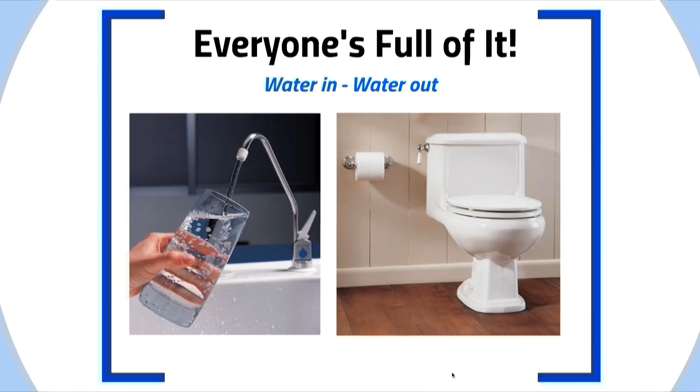Long ago, when the earth was young, the skies rained and there was plenty of water, and those people of that time had plenty of resources. Now fast forward a few thousand years, and now we have millions and billions of people on the planet Earth, and they're all consuming water. Every day, you and I consume hundreds of thousands and billions of gallons nationally. As you know, we're right in the middle of a severe drought that's been going on for several years.

I think it's important for us to stop for a minute to understand where our water comes from. So we're going to start with the Sierra Nevadas. We've got a snow melt up in the Great Sierras, and that water melts down and feeds the Great California Delta, which is the San Joaquin and Sacramento rivers. Some of that water is diverted over the Contra Costa Canal, and then some of that water is diverted over to the Los Vaqueros Reservoir.

I'd like to stop right now and have Chris Dundon come in from the Contra Costa Water District and discuss the California regulations on water conservation.

Good morning, my name is Chris Dundon. I'm the Water Conservation Supervisor at Contra Costa Water District. Back in 2014, the governor declared that we were in a severe drought. He declared the emergency and he called on all Californians to conserve water in every way possible. In April of 2014, he asked every city and community to reduce their water use by 20%, and agencies up and down the state did so.

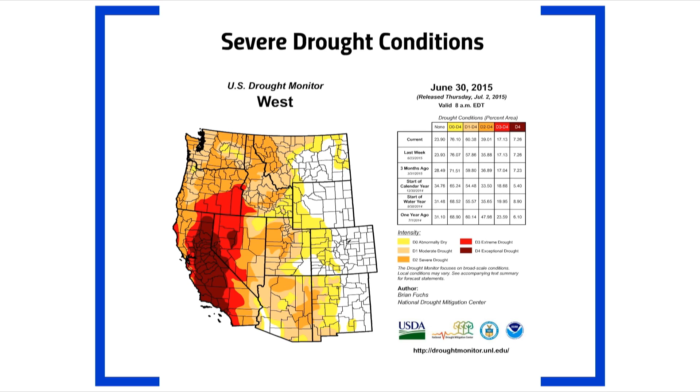The severity got worse, and as you can see in this map here, California is in a very severe drought right now. It's in what we consider an exceptional drought, and most of it is in the Central Valley and in the area we're in here in Martinez.

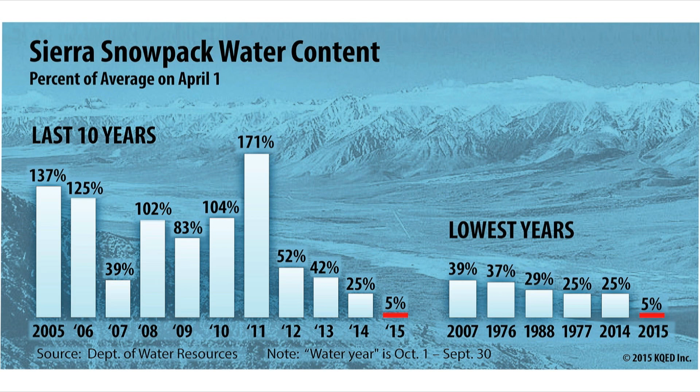Let me talk for a moment about snowpack. You know your water comes from a reservoir. You can think of a reservoir as perhaps a lake where we pump water and it goes into a canal and comes to you. It could be a reservoir in the city hills in Martinez, you might see a tank. That's a reservoir. The biggest reservoir we have in California is the Sierra snowpack. Think of it as a giant tank holding water all the way through spring, and then it lets it out during the spring and summer.

Our reservoir is at its lowest level ever. The Sierra snowpack is now at 5% of what it should be on average. That's lower than the previous lowest level, which was in 1977 at 25%, and again in 2014. So our snowpack is really low this year.

In April of 2015, this year, the state imposed some mandatory restrictions. The governor said, I'm issuing an executive order mandating substantial water reductions across our state. As Californians, we must pull together and save water in every way possible. He authorized the State Water Resources Control Board to have a statewide reduction of 25%. So the mandate was to reduce 25% statewide, and he authorized the state board to determine how they would implement that. So it didn't mean that every community had to cut 25%.

They evaluated how low some communities were and how high some were, and so it ranged anywhere from 10 to 35% what each water district was asked to cut. Contra Costa Water District, which serves this area, including the city of Martinez, were asked to cut 28%. In addition to the call for reduction in water use, the state board also adopted a series of water waste prohibitions. Many of these are fairly basic, and a couple are a little bit more draconian. No using water to wash down sidewalks. That's a given - when you're in a drought, you shouldn't ever do that.

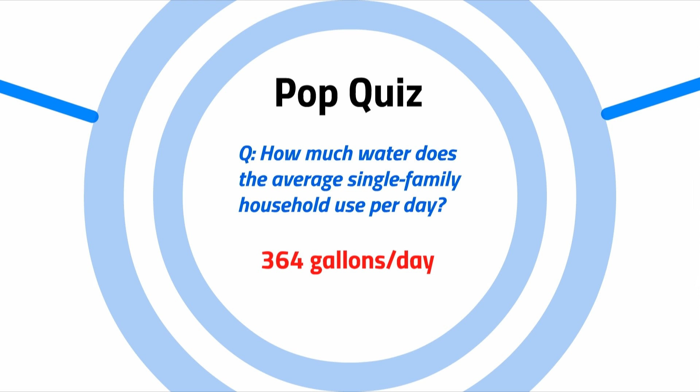How much water does the average single household family use every day? Any ideas? Any guesses? The answer is 364 gallons per day. That's the average here in Contra Costa County. And we're going to use that number moving forward as we discuss ways to conserve at home and outside.

And so what we're going to do is we're going to take that indoor number, that 153 gallons, and we're going to focus in on ways to reduce that number. But before that, I want to really focus in on that 364 gallons per day.

It multiplies out to be over 132,000 gallons per year. That's a lot of water, and if you start looking at it as an individual unit, imagine having all those gallon jugs around.

We've got a lot of water that we consume, and another way of looking at it is in 55-gallon drums. If you take your daily allotment, you every day use 6.65 55-gallon drums. So imagine every day a truck delivering 6.6 55-gallon drums to your household. That's really what's happening when you take that 364 gallons and multiply it out.

So every day we're using this amount of water, and so we need to reduce our 6.6 down significantly. So our target here in Martinez is 25%. That's 91 gallons per day total. And it's broken down to 38 gallons indoor and 53 gallons outside.

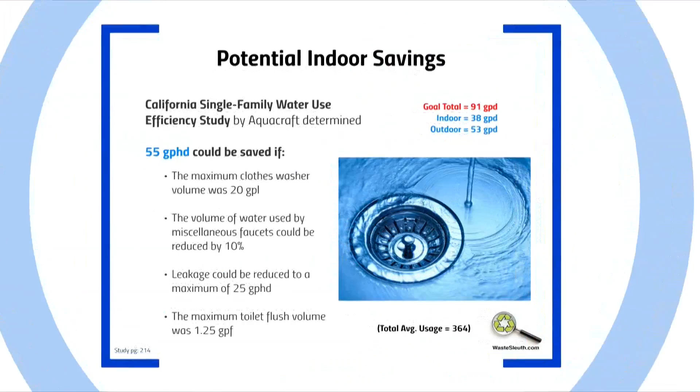An organization called Aquacraft did a study statewide focusing on water consumption in California, and one of the findings is very interesting. It shows that 55 gallons per household per day can be saved by some basic changes. First, using a conservative clothes washer with a maximum of 20 gallons per load. Next, reduce miscellaneous faucet use by 10%. Reducing or eliminating leakage can save 25 gallons per day. And using a low flow toilet with a maximum of 1.25 gallons per flush. If a household had those four practices in motion, you would save 55 gallons per day, which, by the way, is 2 gallons over your outdoor goal. So there are some good numbers right now.

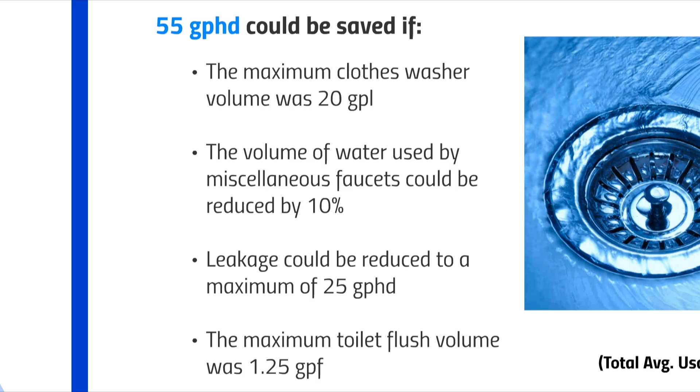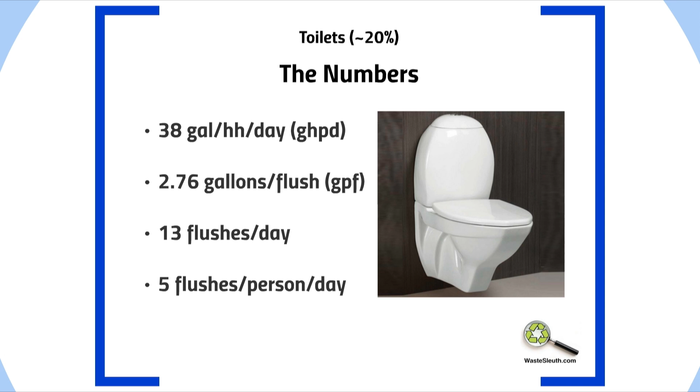So let's jump in and talk about toilets. Here are your basic numbers: 38 gallons per household per day, with an average flush of 2.76 gallons per flush, 13 flushes per household, and 5 flushes per individual. Now that may be different for you, but these are the state averages, and we're going to use those moving forward. When we talk about different types of toilets, there are high flow, low flow, and ultra low flow, high efficiency toilets. The high flow, old fashioned toilets use anywhere from 3.5 to 5 gallons per flush. The ultra low flow use 1.6 gallons per flush, and the high efficiency toilets use 1.8 down to 1.28 gallons per flush.

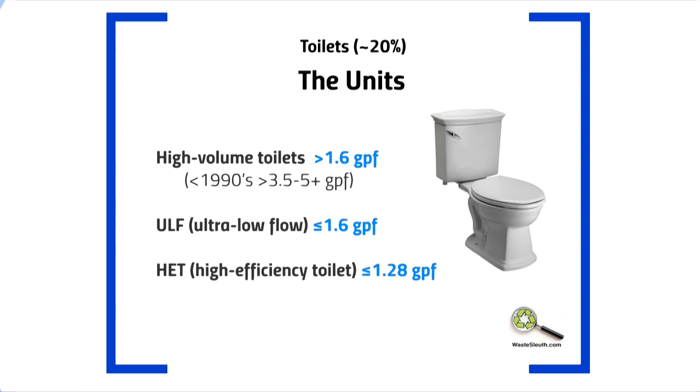So 20% of your daily use is coming from a toilet. Now, I'm going to break this down to an individual and what you can do to save water as it relates to using the toilet. If one person uses the toilet, depending on the type of toilet you have, will determine how much water you can use or save. With a high flow toilet, over 6,000 gallons annually. With an ultra low flow, just under 3,000 gallons. And with a high efficiency toilet, just over 2,300 gallons per flush annually. So if an individual can move away from 5 flushes per day and reduce that by 2 flushes, you will save over 14.5% of your daily reduction target. So reducing by 2 flushes, you're gaining 14% on your target. We're going to tally all that up at the end here.

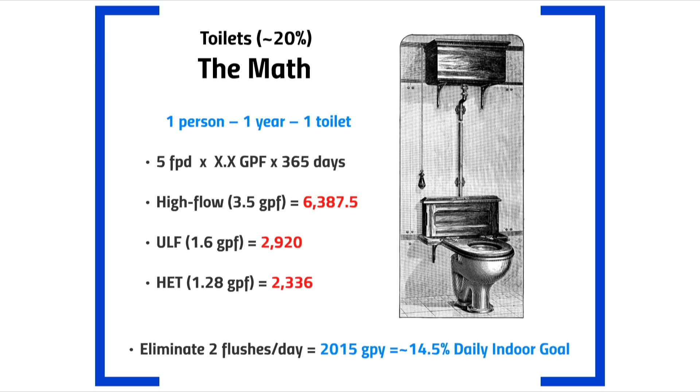So here's the action that we want you to take as it relates to toilets: eliminate all the leaks, check to see if the flapper is leaking, and check the tank level.

If it's too high, it's going to overflow that little overflow spout, and you're going to every once in a while hear it auto-filling. Don't use the toilet as a waste basket. Don't just throw things in there and then flush it away.

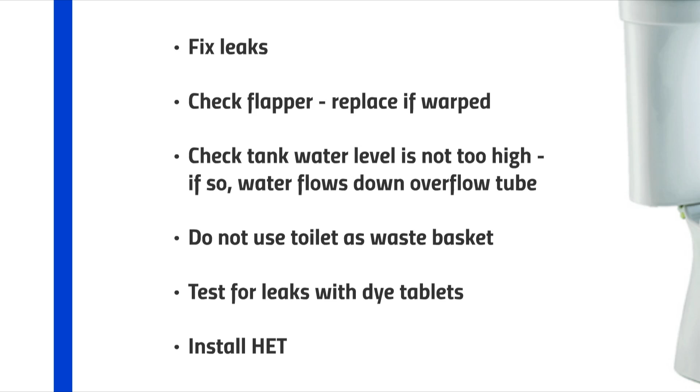Test for leaks. The Contra Costa Water District is offering these dye tablets. If you don't have these dye tablets, you can just use food coloring, like you'd use to color frosting on a cake. Put the tabs in the tank, or put some dye in the tank, wait a few minutes, and flush. If the bowl has color in it, then you've got a leak.

So fix that. There are many water-saving options or devices you can use. One possibility is using this bladder. Now, I want you to understand this bladder is just for a very high-flow toilet, nothing low flow or ultra low flow, because the bag goes in the tank and displaces the amount of water. If you put this in a low flow toilet, when you flush, you won't get enough volume of water, and you'll have to flush a second time. So this bladder is very good if you've got multiple toilets in the house and you're not going to replace all of them. You can put one of these bladders in a high flow toilet.

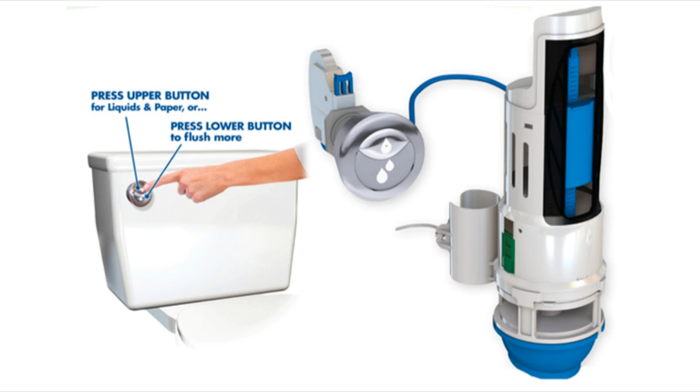Another option is an aftermarket kit you can buy that will allow you to have a dual flush on your toilet. The old saying and the new saying now is, when it's yellow, let it mellow; when it's brown, flush it down. So there you go, you can use that dual flush system. They're sold in kits, and you go in there and install that yourself, or hire a plumber to do that for you. And there's your test dye tabs, and you can put those in there.

So now we're going to move on to showers. Here are your numbers. On average, the average household has 2 showers per day. On average, we're using 18.6 gallons per shower. The duration is 8 minutes and 42 seconds. And the average gallons per minute is 2.14. So those are the basic numbers.

Here's the math as it relates to an individual. If you eliminate 1 shower per day, you can save 50%, or 49%, of your daily indoor water goal. So it's an amazing amount of savings. And if you reduce it by 2 minutes, that's another 11% of your indoor goal. Now, I mentioned already, we're going to roll all these data points up to show you how all these individual acts add up to a lot of savings.

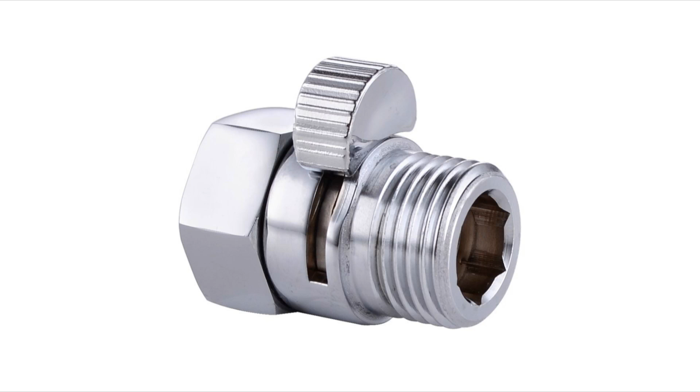You can install low flow devices. The county offers a lot of these shower heads, and they come in different models. You can go to the local hardware store and buy these. This unit here is the one that's given away for free, and the others are some really good looking low flow options. Another thing you can install are these on and off devices that allow you, when you're sudsing up or shaving or whatever in the shower, to turn off the water or turn it down, which will allow you to save water while you're in the shower. They're pretty easy, not very expensive, and you just add them in between your pipe and your shower head.

So, actions you can take to save water: check for leaks at the faucet where you turn the spigot on to turn on the shower. If it's dripping a lot of water there, you want to fix that leak. That's a great opportunity. You want to install low flow shower heads. A lot of folks are realizing there's a lot of water used getting cold water to hot water, so they're putting buckets or tubs underneath the spigot, waiting for the water to get hot. It's a great technique to save a lot of water. You don't want to use a very big bucket because water is very heavy, maybe nothing more than 2 or 3 gallons. You fill that up and then go water your backyard.

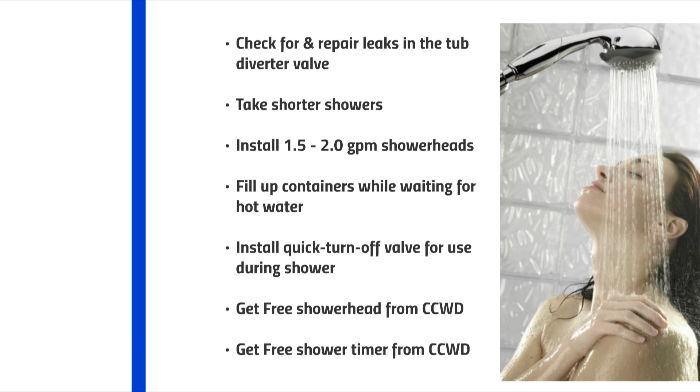Install one of those quick devices I just showed you, one of those turn-off devices, and then certainly install a low-flow shower head—you can get one of those free. There's also shower timers available, like this 4-minute timer. You install one of these on the tile or glass door, turn it, and once it empties out, it's been 4 minutes. So let's move on to faucets.

On average, we're using 33 gallons per household per day with our faucets. We have 57 events per day. That means during the day, in the average household, 57 times we're turning on that faucet, on and off, on and off.

For me, this is something I'm really paying attention to. It's really amazing when you think of 57 as a daily occurrence. Being aware that, you know what, this is one of my 57, maybe I don't need to turn it on, or being very concerned about how long I keep that water on. It becomes an opportunity.

35 minutes is the average use time. 37 seconds of those 57 events, we're on for 37 seconds. So there's a lot of numbers here, but the bottom line is we use our faucets a lot, and that becomes an opportunity for reduction.

So here's the math. If we used 38.5 gallons per day throughout the year, it's 14,000 gallons a year. So what I'm asking you to do is reduce 5 minutes of your 35-minute use time, and that will equal 14.5% savings on your annual or daily use. So again, moving towards your daily goal of 25%, that's 14% right there. We're going to look at that number in a while.

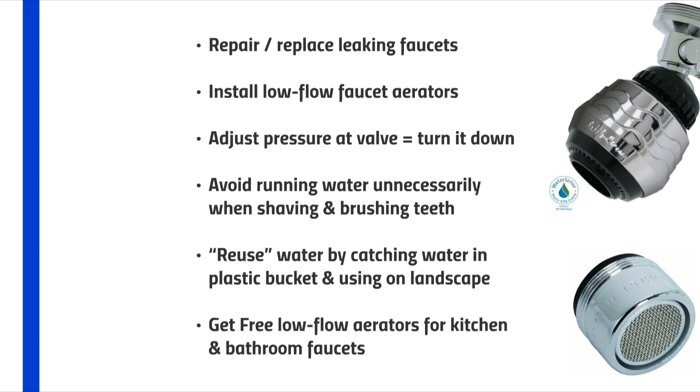Also, inserting these low-flow faucet aerators, something like this. This goes on a bathroom or kitchen sink.

Clothes washers. Here are the numbers. On average, we do 1 load of laundry per day. That's average throughout California. Some people will say, well, I don't do that much, but some people actually do more than that. If you only do 3 a week, and the average is 7 a week, that means somebody might be doing 10 a week. So there's a lot of laundry being washed out there. And on average, we're using 36 gallons per load. So those are your baseline numbers.

Here's the math. If you can eliminate 1 load of laundry per week, you're going to save just under 2,000 gallons per year, and you're going to have a 13.5% reduction in your daily use.

So what can you do? What actions can you take? Always do a full load. Somebody asked me, well, why do I have to do a full load? If you have a smart machine or a new machine, they actually weigh the laundry, so it doesn't necessarily matter if it's full. But if you don't have a smart machine, you definitely want to fill it up, because it's going to use the same amount of water whether it's a third full or 100% full. So on an older unit, make sure you're running with a full load.

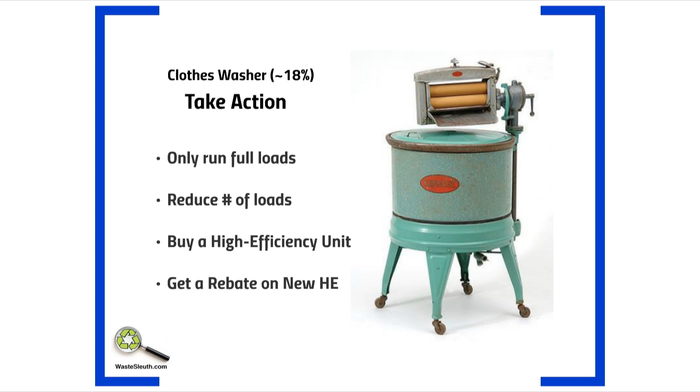You want to reduce the number of loads. You want to look into buying a high efficiency unit, and the Contra Costa Water District is offering rebates on high efficiency units. You can get up to $150 on these units right now. Go to their website for a list of high efficiency models on the marketplace that qualify for this $150 rebate.

Leaks—this is a big opportunity. It represents 18% of your daily use, but they're basically unseen or ignored. It represents an 18% consumption, or opportunity, in your daily diversion goal. 31 gallons per day per household are being leaked in the form of small and large leaks.

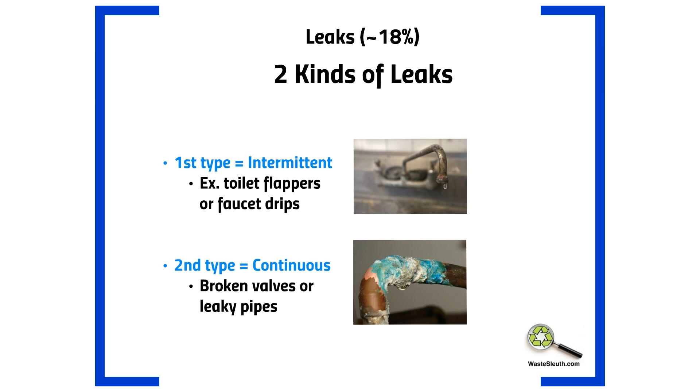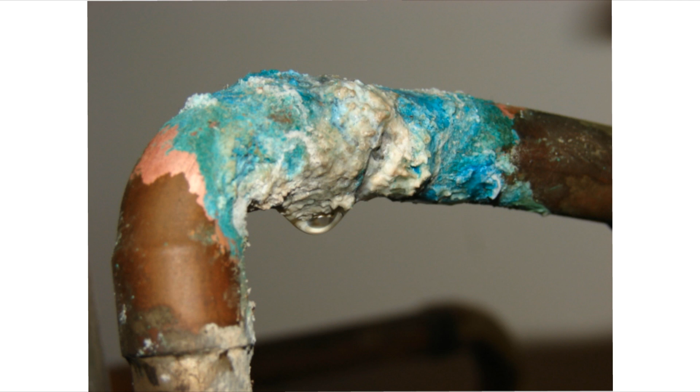There are basically two kinds of leaks: an intermittent leak and a continuous leak. An intermittent leak might be a faucet handle that, if you don't tighten it all the way down, it's going to leak. Sometimes you remember and you tighten it so it doesn't leak, and sometimes you forget and it drips. That's an intermittent leak. A continuous leak would be something hidden behind the walls, on a fitting or an old pipe that's finally failed, and it's dripping all the time.

Now you look at that patina on there, and it has taken a long time for that material to corrode like that. So this has been happening for years. Every day, this house is one of those households that's doing 31 gallons per day. So you want to look for these leaks and repair them and eliminate them.

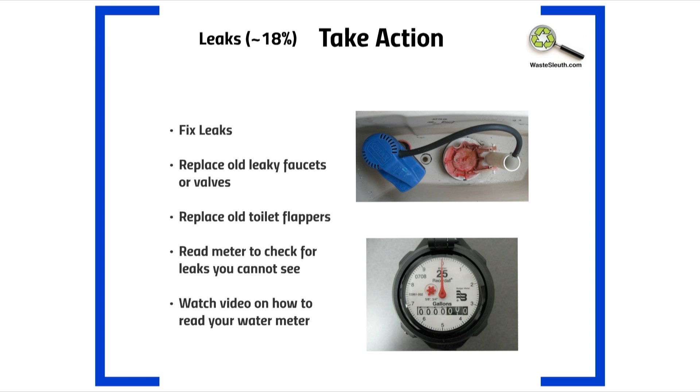So what do you do? Fix the leaks. Another area is to check your faucets. You want to check the flappers in your toilets.

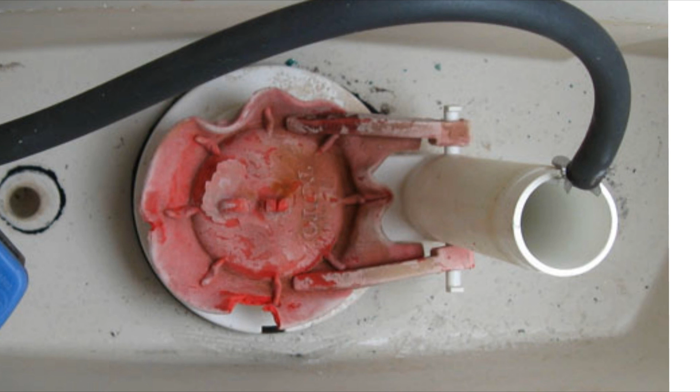Look at that image right there. You can see the flapper is all curled up. So every time you flush, you dump the water out of your tank, and when it fills up, it's going to be leaking slowly around that funky old flapper. They're really easy to replace, they just take a couple minutes, and you're going to save water instantly.

Another important thing to do is take a look at your meter. If you turn every water user in your house off, and you go out and that little red dial on the left is turning, that means you're using water. There are videos available on the Water District's website, or if you Google how to read a water meter, you'll see many videos that show you how to read your meter so that you can determine whether or not you've got a leak.

And then lastly, the small time users are baths, your dishwasher, and the famous category 'other.' Baths are great, but they're a large water use opportunity, on average 35 to 50 gallons. Enjoy them on occasion, but really your best way to go is with a shower.

And just like your laundry, you want to make sure that your dishwasher is full so that you maximize the use of that water when you're doing dishes. And then 'other' is just miscellaneous events or activities that are more hard to classify on this measurement.

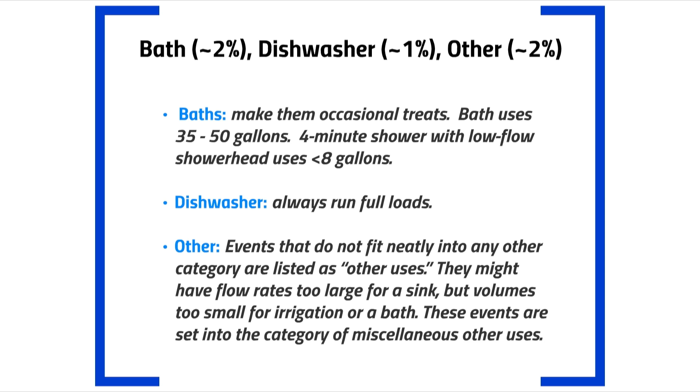So how does it all add up? All those different options that you have in terms of water conservation add up. Toilets, minimize 2 flushes a day, you'll save 5.5 gallons. Showers, shortened by 2 minutes, you'll save 4.3 gallons. Faucets, reduction by 5 minutes, another 5.5 gallons. Your clothes washer, 1 load less, an average of 36 gallons per week.

So now we're going to move on to outdoor water conservation. The US EPA focuses on 3 major areas to conserve water: landscaping, irrigation, and stormwater management, or rain barrels. We're going to talk about all of those issues.

Back to that Aquacraft study, it recognizes reducing your irrigated areas, encouraging the use of low or no water use plants, kind of drought tolerant plants, and ways to prevent over irrigation. We're going to go into all these topics in great detail.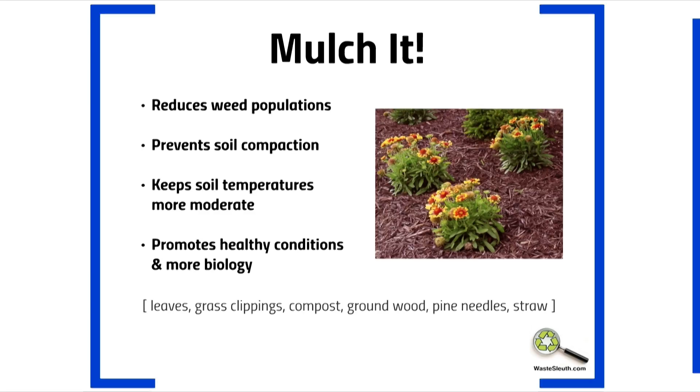Here's a good example of how you can use ground wood as a mulch material. It looks really handsome and it keeps those weeds down. Another option is to take advantage of the Contra Costa Water District's coupons that local landscapers or landscape supply companies have, so you can buy mulch material at a discount.

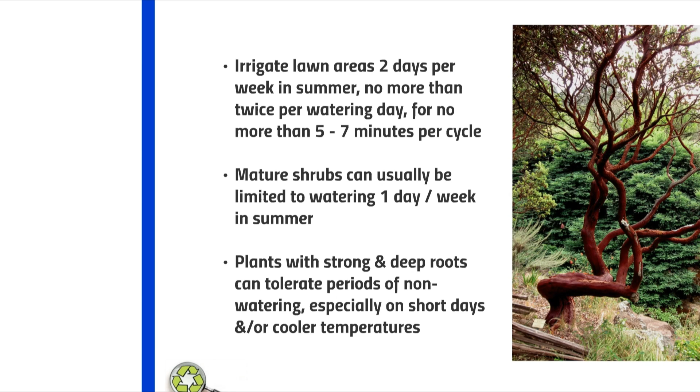And then some basic water-wise tips. Here we've got a photo of a manzanita, which definitely is water conservative. Watering 2 days per week is a good guideline, and if you've got mature plants, they can handle even as low as once a week. Mature plants have hardy root systems and are more tolerant, so again, that low and no water plantation is really the way to go here in Northern California. Survey says that the best way to water is by hand. It's the most efficient and the most conservative in terms of watering.

The downside is it takes a little longer, but I look at that as an upside because it gets you to slow down, get outside, and hang out with your plants for a few minutes or maybe longer. It's really a pleasant way to spend your time.

Watering by hand is very inexpensive. Basically, it's a hose and a nozzle. You get out there and you water. And the Water District is offering free water nozzles, so just get a hold of them and get yourself a free water nozzle if you need it.

Another tip here: these quick release devices that allow you to set up your nozzles and different hoses with this quick release mechanism. It's a one-time setup and they're really, really handy.

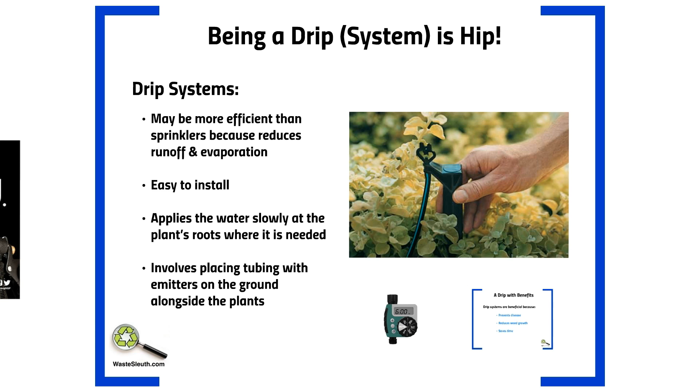Using a drip system is also a good way to go. A drip system is your next best way if you're not going to hand water, using a simple irrigation system. There's a lot of new technology or reinventing of these emitters. If you go to your local hardware store and talk to the person in the landscape area, they can give you some good options on new sprinkler heads or drip system heads. If you've got an old system, you might want to look at some of the new heads because they're more efficient and actually a little bit better at watering than just a few years ago. So you want to check that out.

And there's an image of that timer I was just telling you about. Using a drip system, if you don't have time to hand water, has some benefits. You're going to prevent disease because rather than watering everything, some plants aren't so keen on being overwatered, they might mold or get powdery mildew. With a drip irrigation system, you're dripping right at the root system instead of spraying all over the plants themselves, which helps minimize potential disease.

It's also going to minimize weed growth because instead of spraying all over the area, you're just putting water directly on a particular plant and not watering the open soil around it, which promotes more weed growth and production. In this image on the left, you can see this interesting little gizmo that you'd mount up on your drain system, on your gutter system, on the upper edge of your house. What that does is it can sense when there's water or a rain event.

Now that's pretty fancy, but since then, there are now smart timers, modern intelligent devices that are actually talking to satellites that will adjust your timing schedule. So let's say you set it for twice a week, so many minutes. It will know based on satellite images and information about weather patterns whether or not it should continue to water today, or it says, hey, it's going to be a moist day or a rain day or a cool day, and it will adjust your water pattern.

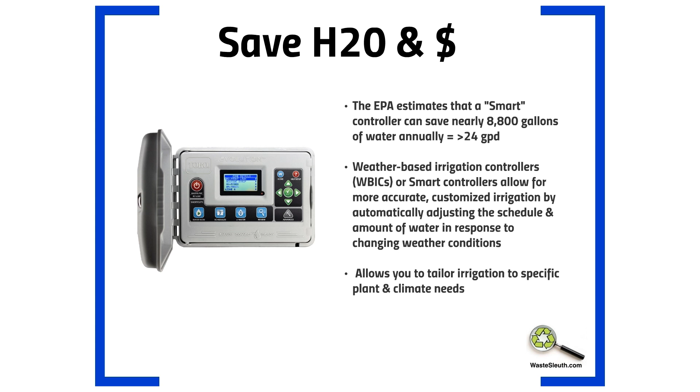So getting these smart irrigators is a really great option, and you can save money. The EPA estimates that you can save nearly 8,800 gallons of water with these timers. Now, like anything, you have to make sure they're set properly. If you don't adjust or set it initially correctly, you could actually end up wasting water. So it's very important to read the owner's manual and set these things so you're not wasting any water.

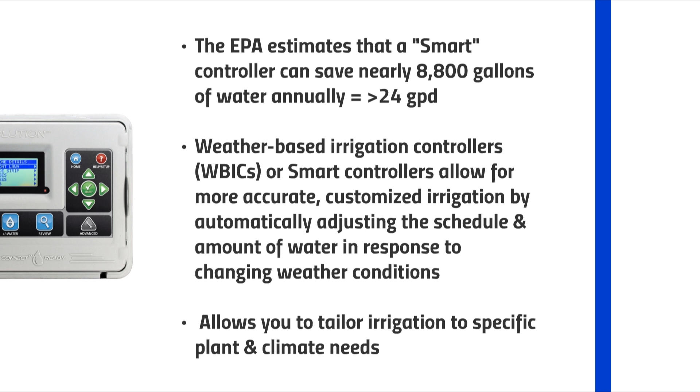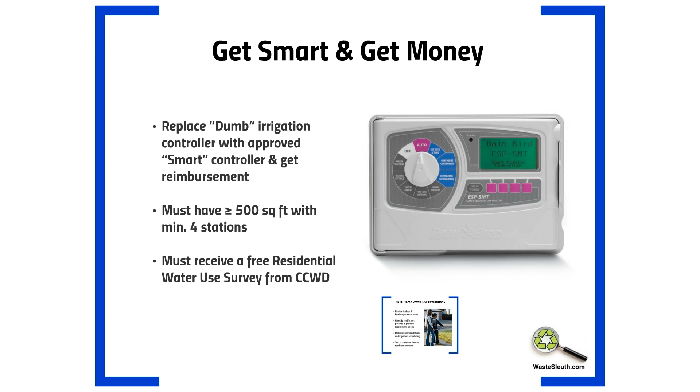So here we go, we've got these weather-based irrigation controllers, and that's what we mean by smart timers. The Water District is offering a reimbursement on particular models. So once again, you're going to want to go to the Contra Costa Water District's website and find out what models qualify for this discount.

In order to get that discount, however, you must receive one of their free water use surveys. So you have to engage with them to qualify for reimbursement on that controller. Again, you're going to need to work with the Water District to get a survey to qualify for a rebate on your smart timer.

And these home use evaluations are going to inspect both indoor and outdoor use. They're going to identify opportunities. They might even be able to give you some tips on how to read your meter. So there's a lot that comes out of having these evaluations. You want to contact the district on how to participate in their survey program.

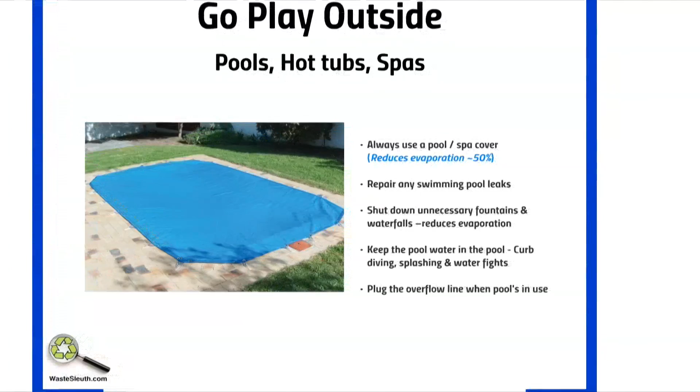So for those of you that have pools and hot tubs and spas, you have an opportunity to save water. The biggest thing to do is always, when not using the unit, cover it up.

You basically save about 50% due to evaporation by simply covering your pool or spa. Of course, you want to look for leaks and fix them. You want to shut down any unnecessary fountains or waterfalls, since that's just going to increase your evaporation.

And then my favorite one here, it's kind of tongue-in-cheek: no fun allowed, no splashing, no water fights. So you just get in there and stay calm. No, but seriously, have fun in the pool.

The most important thing is to cover the pool, and the last point is to cover your overflow. When you're in the pool filling it up and splashing around, make sure you plug the overflow area so the water stays in the pool. Then when you get out and the water's not bouncing around, unplug it so your overflow system is back in line.

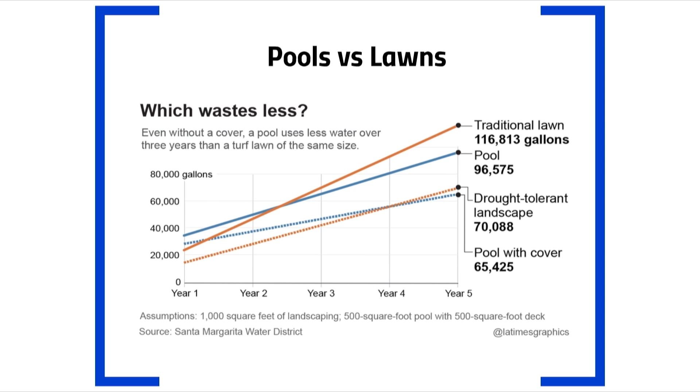There's been a question about pools versus lawns. Some people say pools are really wasteful, but the information that's out there, a study done by the Los Angeles Times, shows that after 3 years it's proven that a pool is more conservative than a lawn of the relative same footprint. In other words, if your pool area is 20 by 20 and your lawn is 20 by 20, your pool actually uses less water than the same square footage as a lawn. So that's pretty interesting—put in a pool, go swimming, have some fun, take out your lawn.

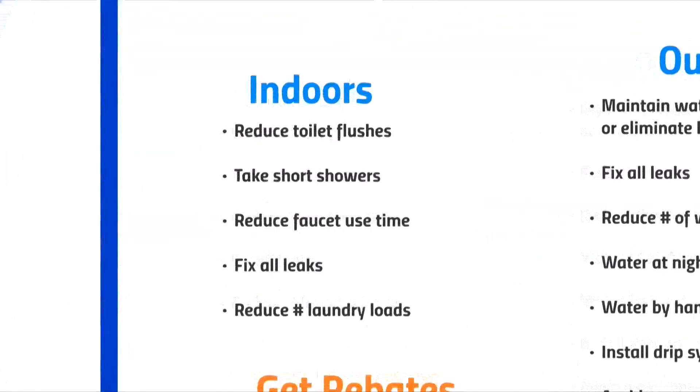So to summarize both indoor and outdoor water conservation, here are your top 10 plus actions: reduce the number of flushes, take shorter showers, reduce your faucet use time, fix all of those leaks, and reduce the number of loads of laundry you do throughout the week. Outside, minimize the amount of water-intensive plants, again fix all your leaks, reduce the number of days that you water to a maximum of 2 days per week, and water early in the morning or late in the evening. Your best option is watering by hand, your next best option is using an irrigation drip system, and always avoid overwatering, whether by hand, timer, or drip system. You always want to avoid overspray and any runoff.

So this concept, we're talking about water savings—we can read flyers and look at an online website, but a poster doesn't save money, a poster doesn't save water, but you can. That's the whole idea: to recognize the power that you have as an individual to conserve water. And another idea here is, for those who have the privilege to know, and now you do, you have the duty to act. So now that you have some tools and techniques on conserving, it's your duty to act and use those.